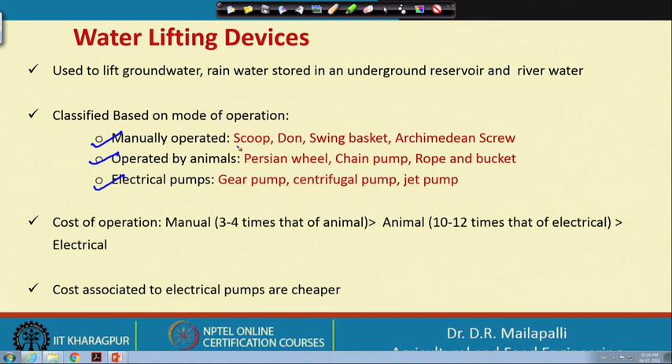Manually operated devices include the scoop, Don and swing basket, and Archimedean screw. All of these come under manually operated water lifting devices.

Animal operated devices include the Persian wheel, the chain pump, and rope and bucket. These come under animal operated water lifting devices.

Electrical pumps include gear pumps, centrifugal pumps, jet pumps, or mixed flow pumps, and there are other pumps available which we are going to see.

The basic classification: for the scoop, one end is tied, and the other end of the trough goes into the water source. By oscillating the trough, you fill it with water from the reservoir, and when you bring it down, the water flows into the other end.

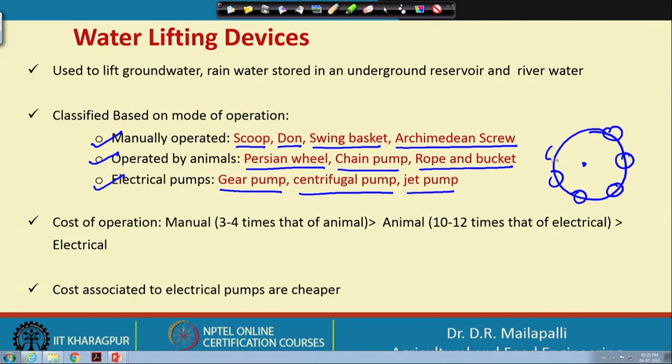Similarly, the Persian wheel is a kind of wheel which has buckets on top. Since it is placed at a water source, when it moves from one position to another, the bucket carries some water, and finally that water is thrown out at the top of the wheel and delivered to the nearest field.

Then there are gear pumps and centrifugal pumps. Gear pumps are positive displacement pumps, while centrifugal pumps and jet pumps are variable displacement pumps, depending on whether discharge varies with head or not. Mostly electrical power is used for this category, whereas the other categories use manual or animal power.

Looking at the cost of operation, manual operation is 3 to 4 times costlier than animal operation, while animal operation is 10 to 12 times costlier than electrical. So comparatively, electrical pumps are cheaper than animal and manual methods.

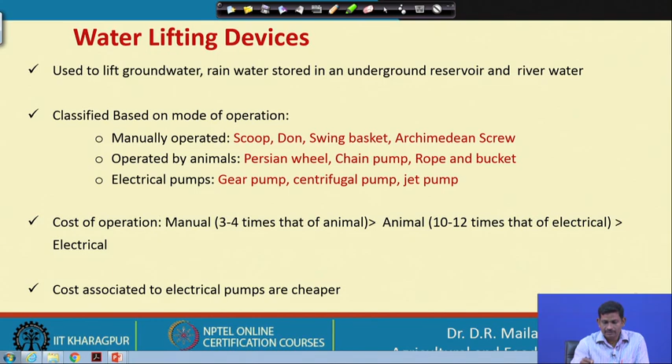Next is the principle of operation of all these devices. Broadly classified, the first is direct lift: lifting water in a container, suppose you take a bucket and lift it with your hand. That is called direct lift - simply lifting from one place to another.

The second principle is atmospheric pressure, where water is lifted by creating vacuum in a chamber which sucks water up to a maximum pressure of 1 atmosphere. In a pump, there is a suction side and a delivery side. On the suction side, negative pressure is created, less than atmospheric pressure, and on the delivery side, positive pressure is created, more than atmospheric pressure. Because of the suction, water is lifted up, and then due to the positive head, it is thrown out. So based on atmospheric pressure, water is lifted.

The third principle is positive displacement, where water is displaced from a lower to a higher level. Just like in a Persian wheel, the buckets take water out and lift it upward, carrying it back - it is positively moving upward. A reciprocating pump also works on this positive displacement principle.

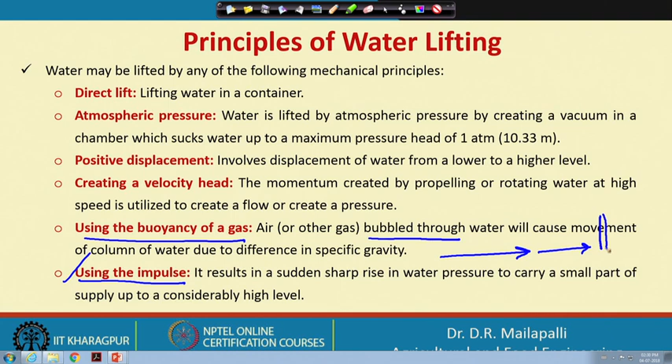And then using the impulse, that means the hammering force. Suppose there is water flowing quiescently, and all of a sudden if you create a break or impulse, the wave recedes back. So that creates the wave, and definitely creates oscillations, and that can be used to displace water from one place to another.

So the best example in this case is the hydraulic ram, also called hydram, which works on the principle of water hammer.

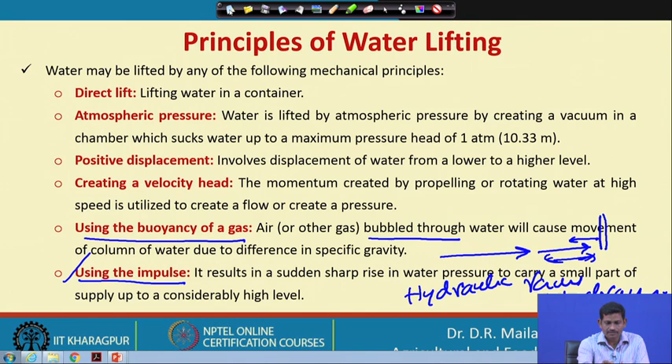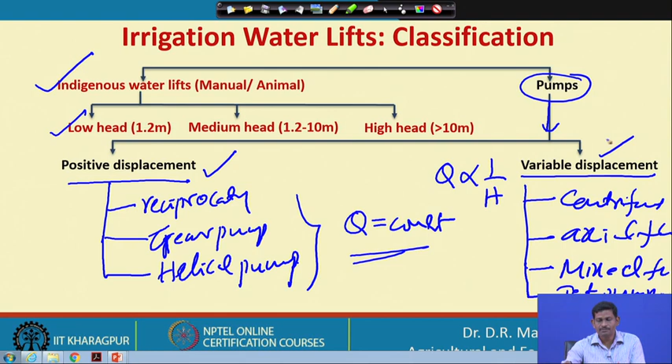So the positive displacement pumps displace water from one place to another positively, without losing water while transporting from low head to high head. With positive displacement pumps, even if you change the head, that does not influence the discharge much in the positive case—discharge is almost constant even if you change the head. Whereas for variable displacement pumps, discharge will vary inversely with the head: if you increase the head, the discharge is going to decrease. We are going to see these positive and variable displacement pumps in the following sections.

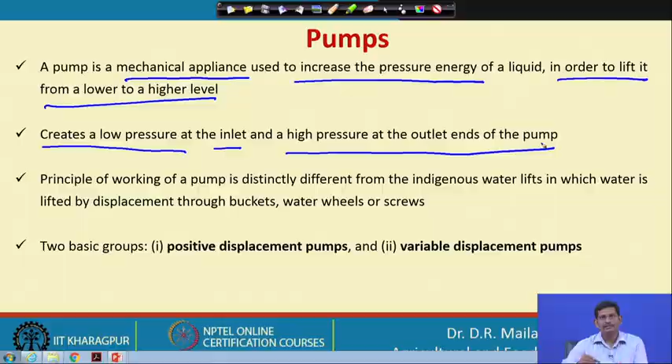So basically, as I said, a pump is a mechanical appliance used to increase the pressure energy of a liquid in order to lift it from a lower to a higher level. This is the main definition of a pump. So the pump creates low pressure at the inlet and high pressure at the outlet end, which creates suction at the lower end, and at the delivery end the pressure head will increase.

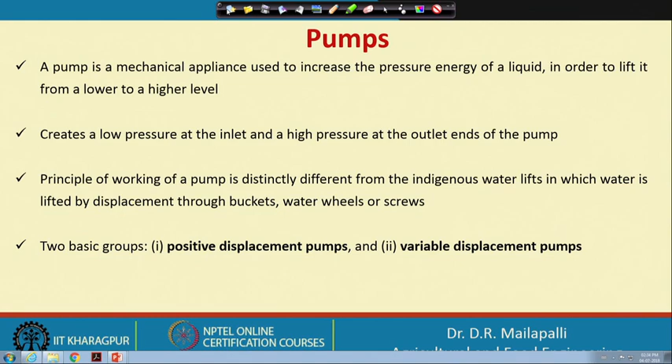The principle of working of a pump is distinctly different from indigenous water lifts, in which water is lifted by displacing through buckets, water wheels, or screws, and which also do not require electricity. Whereas electrical pumps require electrical energy. There are two basic groups, as I said: positive displacement pumps and variable displacement pumps, and we are going to see how they are different.

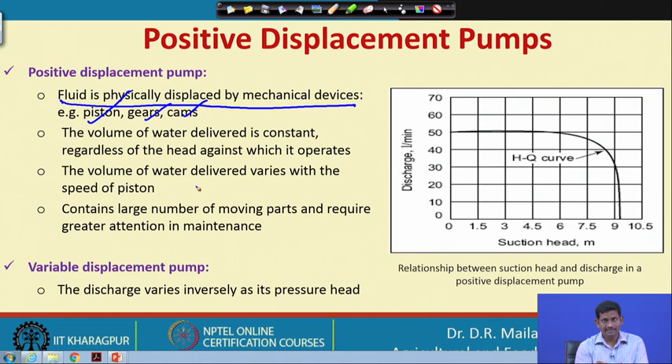In the case of a positive displacement pump, the fluid is physically displaced by mechanical devices like a piston, gears, and cams, which help in displacing water from one place to another. The volume of water delivered is constant, as I said—even at lower heads, the discharge is constant because it's a positive displacement, working through the rotation of a particular device which displaces this, regardless of the head against which it operates.

The volume of water delivered varies with the speed of the piston. So basically it does not depend on the volume of water or the head, but on how fast the piston is moving inside, or the number of strokes it is making. And it contains a large number of moving parts, which require more attention and maintenance.

Since it has a lot of moving parts, it requires frequent maintenance. Whereas in a variable displacement pump, the discharge varies inversely with the pressure head.

In this graph, discharge is on the y-axis and suction head on the x-axis for a positive displacement pump. If you see, as head increases, the discharge is not influenced much up to a certain point or certain head.

After that point, the discharge is going to decrease. This is basically due to the atmospheric pressure.

All these pumps work on the principle of suction, which is lower than atmospheric pressure.

Generally, one atmosphere is about 10 meters, that is, 10 meters equivalent water height.

But that is theoretical. In practice, if you take the losses into consideration, you may get like 7.5 meters or something like that.

Up to that point the discharge may be constant, then after that the atmospheric pressure definitely influences the suction.

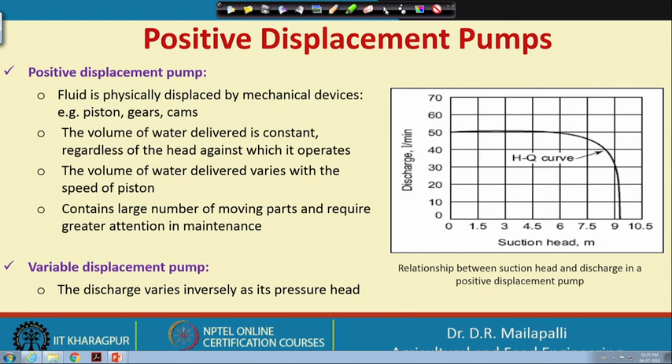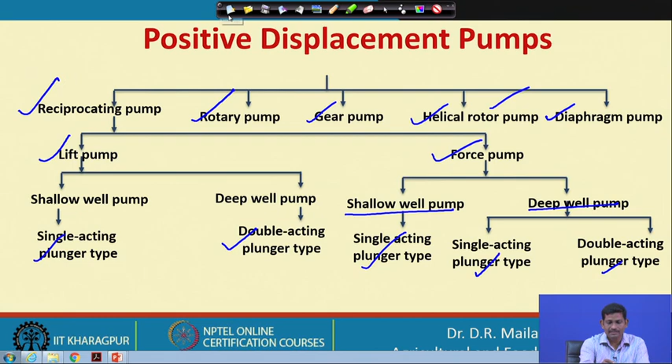So here, let's look at the reciprocating pump.

So this is the to and fro motion. Remember, for one stroke it takes in water, then on another stroke it releases water.

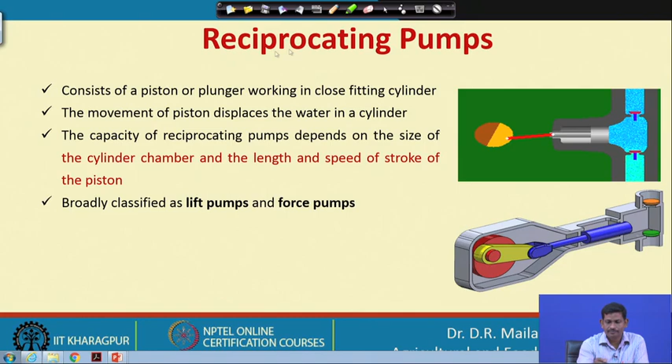So, as I said, a reciprocating pump could be a lift pump or a force pump.

The lift pump is designed to pump water from the source up to the level of the pump spout only.

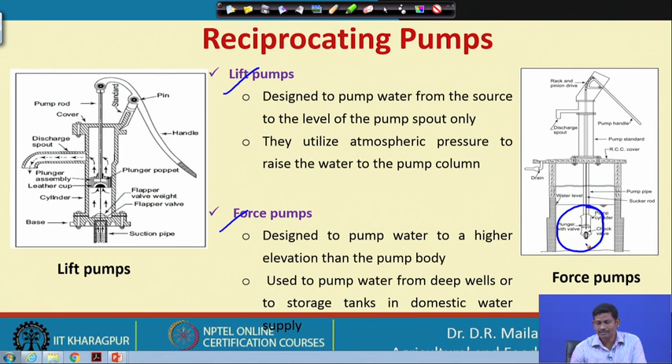And in the reciprocating pump, if you observe the theory behind this, the area swept by the piston is area equal to pi by 4 d square, that is the area of cross section, where d is the diameter.

So the area swept by the piston is pi by 4 d square, and volume swept is, suppose this is L, the piston length, so that gives the volume swept, A into L. This much volume for each stroke will be carried up, and then there is volumetric efficiency.

That depends on how efficient the theoretical volume is compared to actual volume. So the actual volume is, if this is Q, based on the efficiency of the theoretical volume you get actual volume, and then pump discharge is equal to Q into this swept volume multiplied with number of strokes, you get the total discharge.

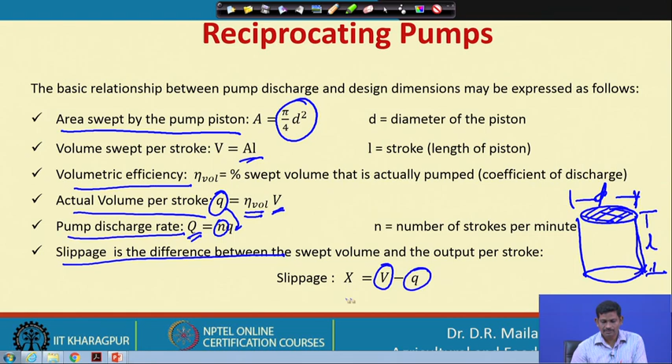And then slippage is basically causing the difference between actual and theoretical volumes. So slippage is denoted as theoretical volume minus actual volume, and that difference gives the slippage.

And then the other thing is the force required by a reciprocating pump to lift the piston. Basically, in order to lift water, suppose this is the piston, this is the cylinder, suppose this is the water, in order to lift water from here to here, from this point to this point.

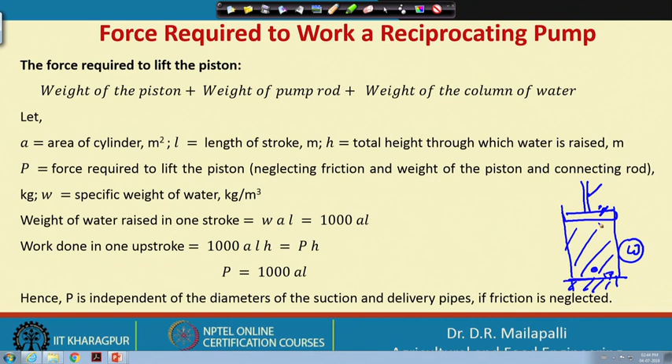It has to experience the weight of the water, and then the weight of the piston and the weight of the piston rod. So these three weights we have to calculate, that much force we have to use here in order to lift. So the weight of the piston, weight of the pump rod, and weight of the column of water, these three things we have to add up, and that will be equal to the total force applied on the piston in order to lift water.

So if area A, small a, is the area of cylinder, L is the length, H is the total height through which water is raised, and P the force required to lift the piston, and W the specific weight of water, then weight of water raised in one stroke is equal to W times A into L.

So A into L is the swept volume, and if you multiply with the density or specific gravity, you get 1000 into A L, where W is in kg per meter cube. So that 1000 into A L is the weight, and this is kg force, we call it kg force.

So then work done in one stroke: work done is force multiplied by the distance, giving F into S. The distance here is small h, through which you can lift water. That is the distance the force needs to be applied to take that weight up to the distance h, so that equals P h.

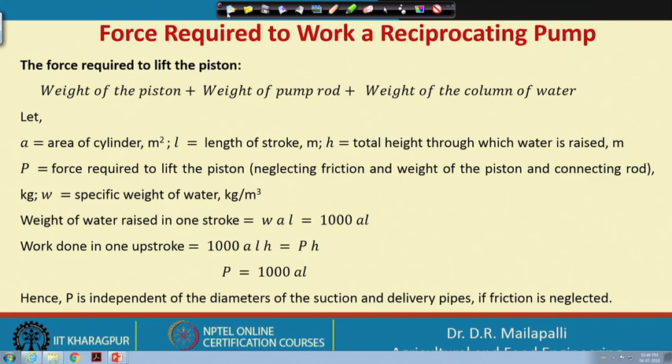During the suction stroke, the pressure of the air in the vessel maintains the flow of water through the delivery pipe. So that I just explained.

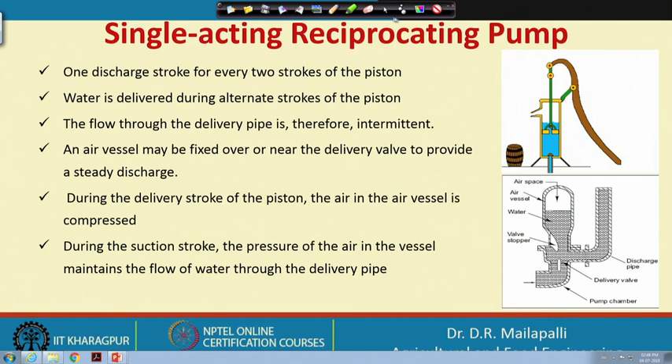Next is the double acting reciprocating pump. Here, this whole thing is a chamber, and this is the suction and this is the delivery, and this is suction. Look at this, so in the center there is a piston, and the piston goes to and fro motion. Suppose the piston is taking this motion, which we call outstroke. During outstroke, the piston moves up to this point, creating suction here, and water will enter through this.

At the same time, if you see, the diagonal points act the same way, so here this opens up. Due to this, it delivers here. At the same time, these two diagonals do the opposite — if these two open up, this closes up. So when this closes up, in one stroke, the diagonal valves close or open accordingly.

So in one stroke, in each stroke you get a discharge point, unlike in the case of single acting pump. So there, you can see.

What you call a video here — wait a minute, so the video can be shown in case of single acting. Anyway, so it is not working, but that is okay.

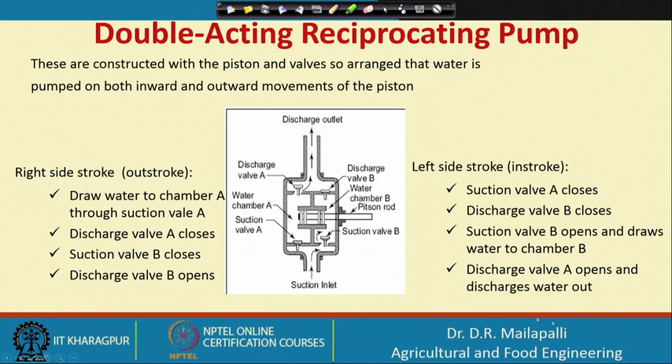So in single acting, double acting case, you get one discharge for one stroke. Here there is an example.

The single acting reciprocating pump has a piston diameter and a stroke length. The piston makes 40 double strokes per minute. The suction and delivery heads are 5 meter and 10 meter respectively. Find the discharge capacity of the pump and the force required to work the piston during the suction and delivery strokes. If the efficiency of the suction and delivery stroke are 50 and 60% respectively, find the HP required of the pump in operation. So this is a single acting pump.

So 10 centimeter is the diameter and 20 centimeter is the stroke length. Once we know that 2 strokes give 1 discharge point, but before that, the area of the piston is pi by 4 d square. Putting the values you get the area of the piston, and the swept volume is obtained by multiplying with the length, giving the swept volume per stroke.

Then the pump discharge is equal to — we know the RPM is 40. It's clearly mentioned 40 double strokes, meaning one double stroke leads to one discharge point. So the discharge multiplied by number of double strokes in a minute gives the discharge of the pump, which is 62.8 LPM.

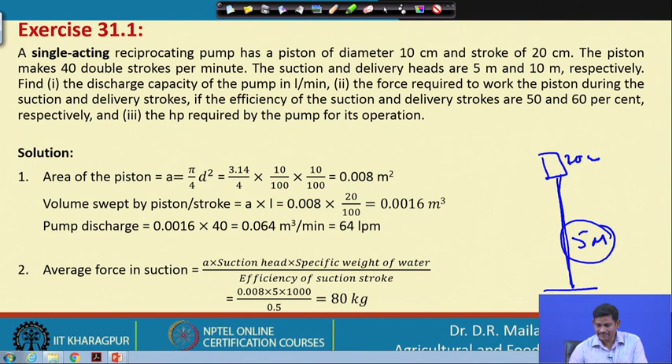So this is the piston, but instead of taking 20 centimeter, we took 5 meter. This is suction, right. So why we took 5 meter? Because the force in order to take water from this point, even if it is 20 liter or 20 centimeter of that volume, you need to transport this water all the way through.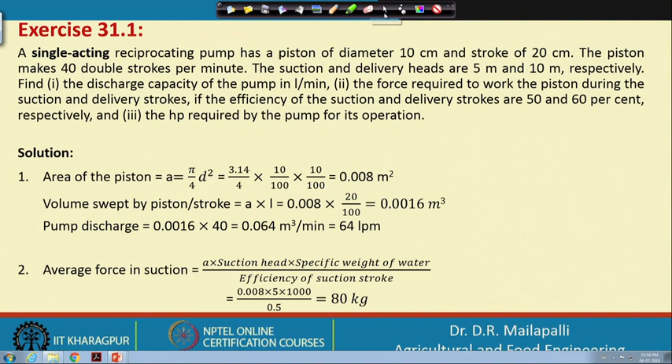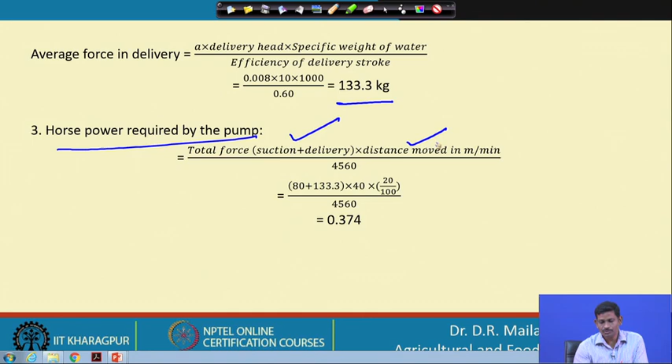So then only you get water here. Even a small disturbance, small volume of water, unit of water must be taken from here. So this is a continuum actually. So here average force is done, then after that average force in delivery, similar to suction, delivery also you calculate, and horsepower required is the total force suction plus delivery into distance moved divided by constants, there is a standard formula. So then finally you get 0.374 as the pump HP.

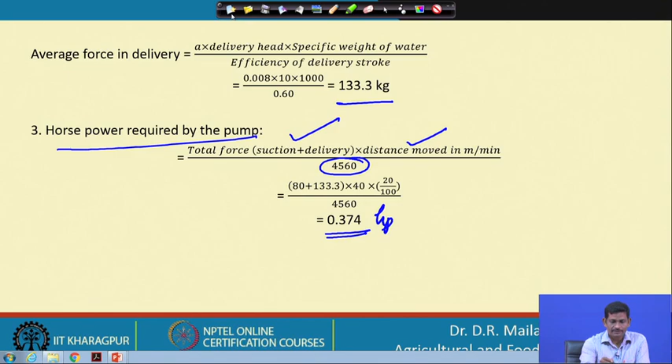And then the next example, similar kind, but in case of double acting reciprocating pump, has a piston 20 centimeter diameter, and piston rod 5 centimeter diameter. If you remember, in case of double acting there is a piston in between.

So suppose you have this, let us see this, and you have the piston in between. So here one wall, there is another wall, another wall, another wall, so there are 4 walls around here, and this is the piston. This is the piston rod, this is the piston rod, and this is the piston cylinder, this is the cylinder and this is the piston. And then there are valves, this is suction, this is delivery.

In this case, the length of the piston stroke is 30 centimeter, and the speed of the crank moving the piston is 50 rpm. The suction and discharge heads are 5 meter and 10 meter respectively. Determine the discharge capacity of the pump and the HP required to operate the pump. Remember here, one stroke leads to one discharge.

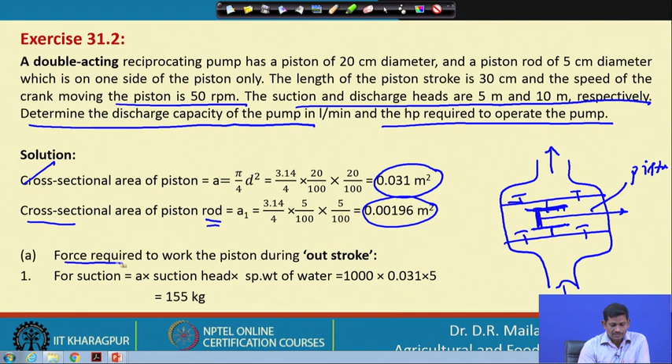So the first thing is the cross section area of the piston, using pi by 4 d square, and you get this. The cross section area of the piston rod, the rod diameter is given, and that is this. And the force required to work the piston during outstroke. Outstroke in the sense, we are taking the piston this side, this is outstroke.

In that case, for suction, what happens? If you take the outstroke, that means this valve is going to close and this one is going to open because of the suction. So for suction, definitely the force is area, this is the swept area, and then suction head into specific weight of water. So that will give 155 kg during the suction.

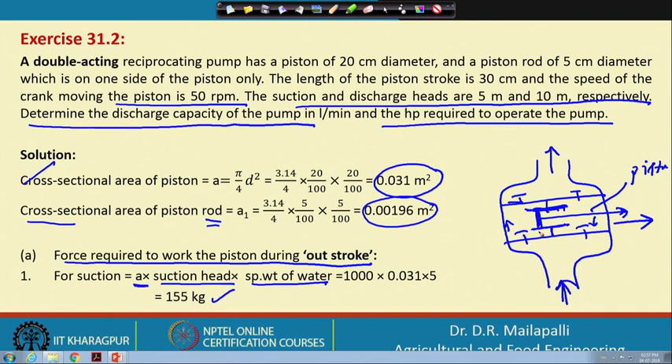And similarly for delivery, the delivery means the other chamber, the other side. So you have this piston, this side you have the suction, the other side you have the discharge. So when talking about delivery or discharge, you have to subtract the area of the piston rod, volume occupied by the piston rod. So that is A minus the rod area, into delivery head and specific weight of water, and that will give this much. The total force during outstroke is suction plus delivery, you get the total here.

And the force required to work the piston during in-stroke, similarly the opposite. In-stroke means going this side. So when the piston is moving this side, suction will be created here, delivery will be created here. So if this chamber is suction, you have to subtract the area of the rod. So it's A minus the area of the rod, suction head and specific weight of water, giving this much.

And delivery, you need not subtract, because delivery is happening in this chamber, and that is simply the cross section area of the piston, suction head and specific weight of water. And that leads to 310 kg. The total force during in-stroke is the sum of these two, and the discharge during in-stroke will be A into L into RPM, that is A into 30 by 100 into 50, which gives 465 liter per minute.

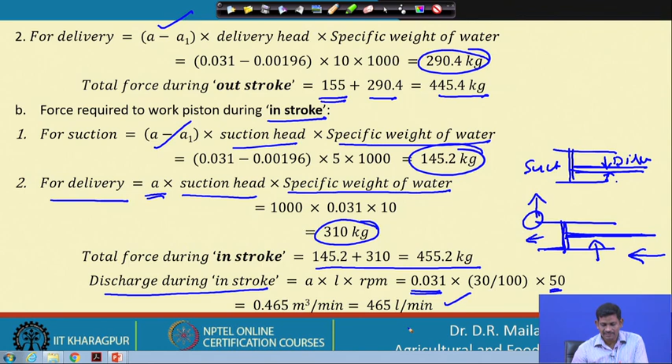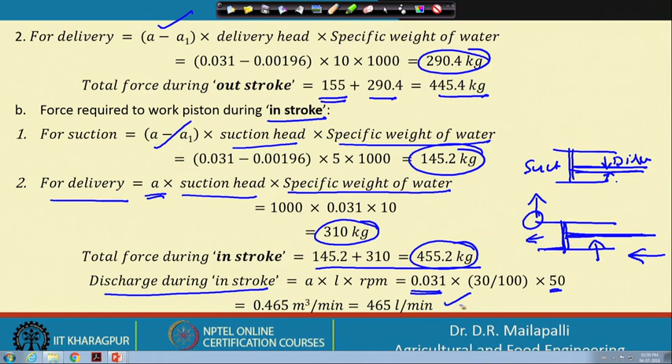This is discharge during in-stroke. Total force during outstroke is calculated, and total discharge during in-stroke is calculated. Similarly, total discharge during outstroke needs to be calculated.

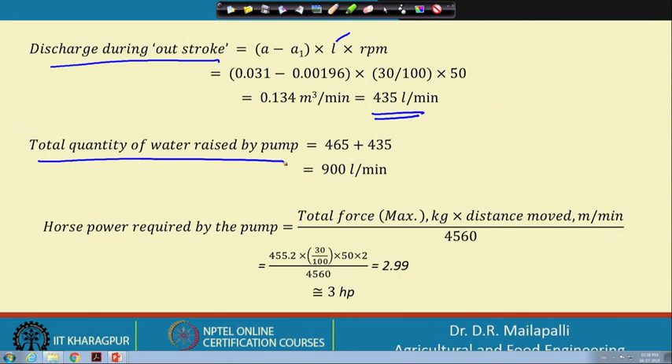So that is the total discharge during outstroke, that is A minus A1, area into L into RPM. That will give your discharge outstroke, and then total quantity will be discharge during in-stroke plus discharge during outstroke.

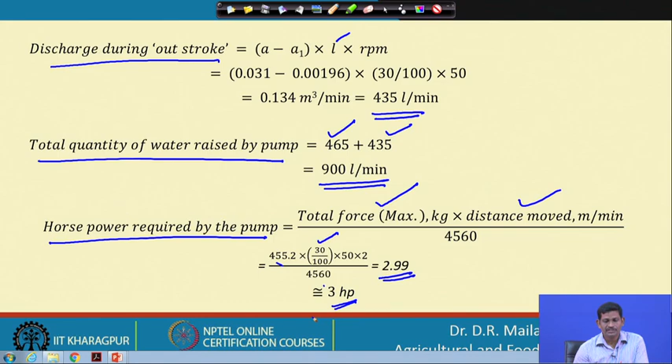That will be 900 liters per minute. Horsepower equals total force, that is the maximum force, into distance moved. Here the total force is 455.2, the maximum of these two, into distance moved, that is 30, divided by 100, and 50 into L, 50 into 2, because the distance moved is 2 double strokes. So 50 into 2, which gives 2.99, that is equal to 3 HP. This is how we solve this problem.

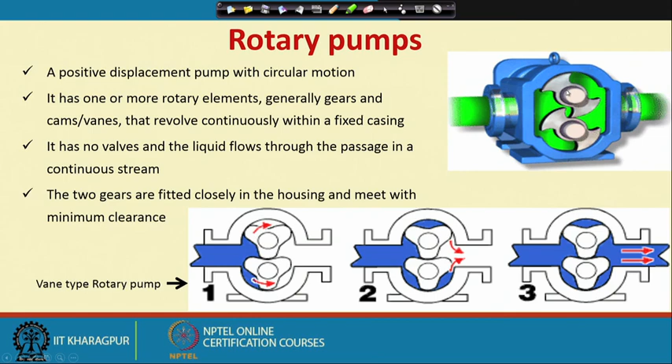The other pumps are like rotary pump. Rotary pump works on the principle of rotors, here you can see the cams. The cams are rotating, one is a drive cam, the other is like a slave. The drive helps the slave, and then it transports water by pushing the fluid into the gap, every time a fixed amount of water is transmitted from one end to the other end.

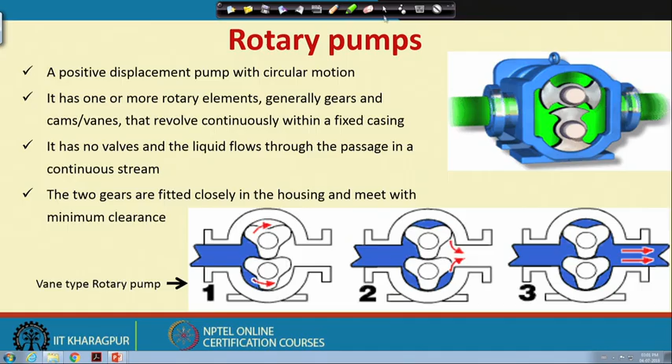If you see this picture, initially water enters through this cam kind of thing. Then because of this motion, the fluid enters through the next chamber, then finally through the outlet. And the next is the gear type.

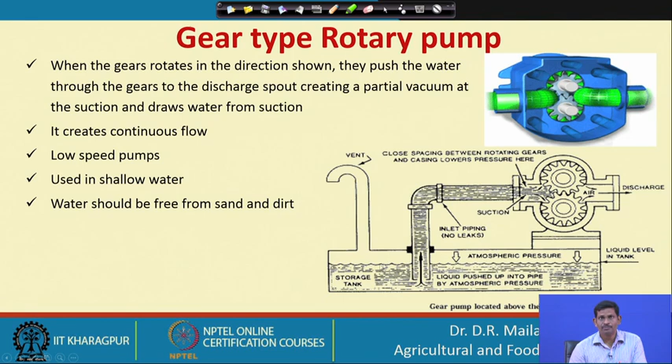Gear type is also similar to the cam type, gears also work on a similar principle. This is basically used in shallow sumps, or for pumping kerosene or oil, so these gear pumps are being used.

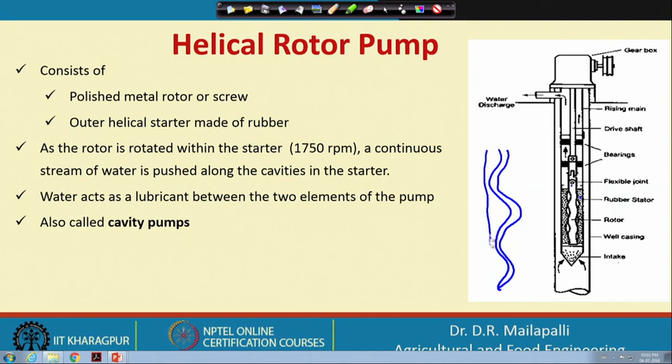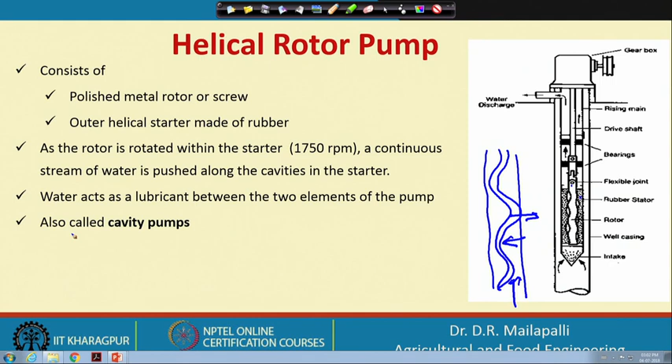In case of helical pump, the main mechanism here is the rotor, a metal helical rotor, and a rubber stator. The rubber stator creates cavities when it rotates. When this helical rod rotates on the rubberized surface, it's sometimes pushing and sometimes pulling. It pushes the rubber and at the same time pulls, creating a vacuum, and the vacuum helps in pushing the water inside. So sometimes this is called a cavity pump, because it creates cavities in the rubber stator.

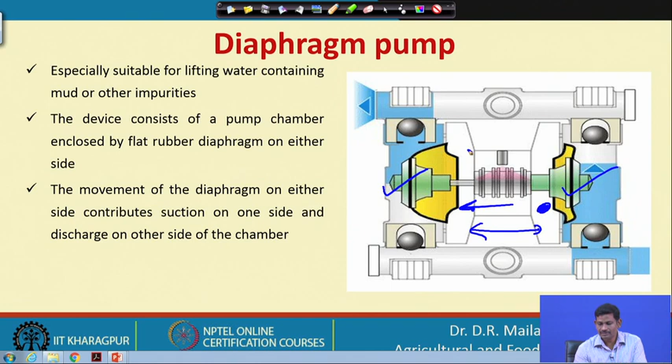For each stroke, there is a discharge point. If you observe, there are two diaphragms, one here and one there. It goes in a to-and-fro motion. When it goes in one direction, it creates suction here; when it comes back, it creates suction on the other side, and the same happens for delivery.

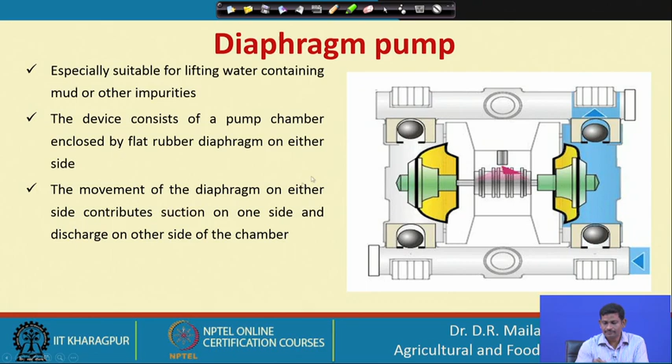So this is all about the water lifting devices, where we focused mostly on reciprocating pumps. Reciprocating pumps are positive displacement pumps that positively displace water from low head to higher head. Mostly these are plunger pumps, piston pumps, or gear pumps. This is basically in two parts, single acting and double acting. In single acting, two strokes give one discharge, whereas in double acting, one stroke gives one discharge, and we solved two problems here for single acting and double acting pumps.

We also saw the working of other pumps like the diaphragm pump, with two diaphragms made of rubber sheet; the flexibility creates suction which helps in pulling the water. Then there are cam type pumps, vane type pumps, and gear type pumps, mostly used in shallow waters for irrigation purposes. Diaphragm pumps are used for watering paddy fields and other things.